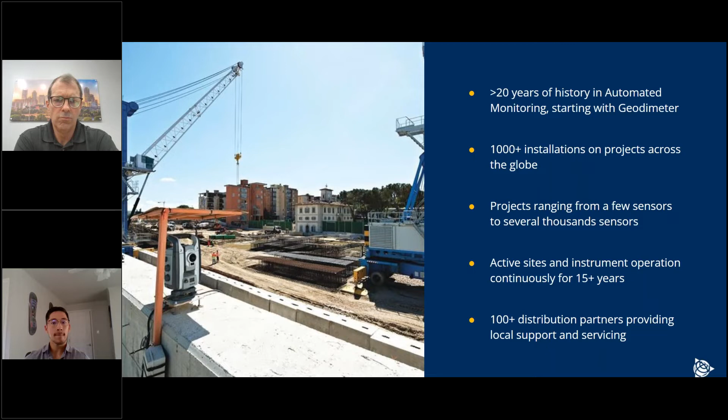We offer everything from that semi-automated to that fully automated system. As we like to say, from the tripod to the pillar installation. So the semi-automated being focused on that traditional manual workflow, but really just automating those workflows. So if somebody's going to site with a total station or a GNSS rover or geotech equipment, and they're taking those measurements manually, we're really working to make it easier to do that so it frees somebody up on site to go do other things.

So with the total station and data collector, it's got a module on there that will run the rounds for you. So you can set your total station up, connect your data collector, run rounds all day long, and then tear your stuff down and go home, come back two weeks later, set it up and do the same thing.

And then we also have that fully automated setup. So when you set your total station up in the field permanently to run 24/7, either because you have a higher risk structure that needs higher frequency data on it, or if you're operating for a long time, it just makes more sense to set it up permanently so you don't have to keep going back to the field. We really have a solution dedicated to each of those workflows.

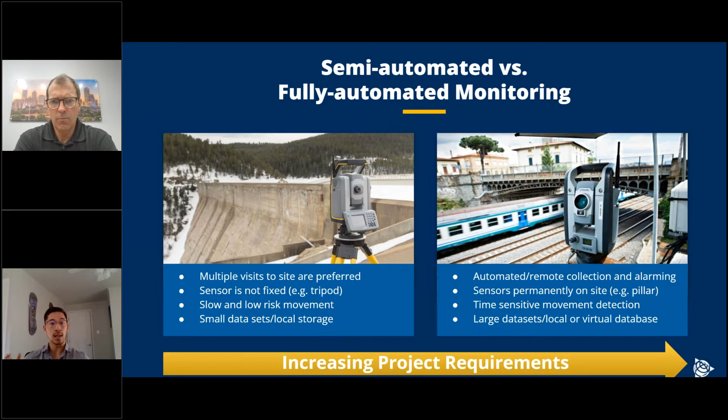Today we're focused most on automated monitoring, so we'll do that highlight for the portfolio. There are really three main components to an automated system. One, obviously, is your sensors in the field. And with the automated system, there's a lot more flexibility with the actual sensors that you're using. So you can use anything from the standard total station and prisms, GNSS systems, and adding geotech and weather stations to that mix, combining all sorts of different data types.

Everything in the field is going to need power and communications. Anybody who set up a system knows that that's a key component.

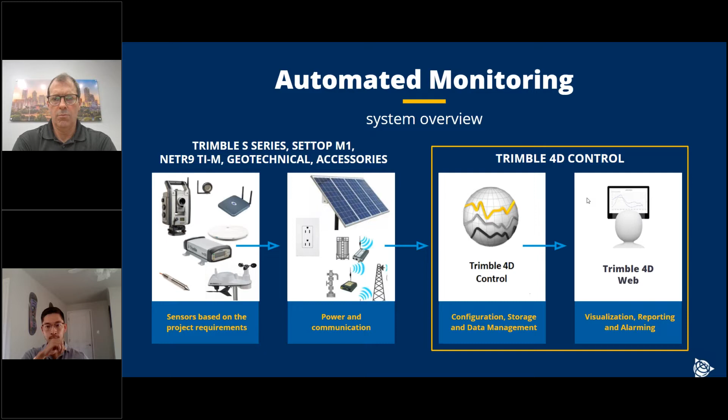And then along with that, we have the software package called Trimble 4D Control, or T4D. That's split into two sections. There's T4D Control Server, which runs as the backend that does all the data collection and data processing. And then the front end, which is called T4D Web or Trimble 4D Web. That's really what users and customers are going to interact with. It's the tool we have for visualization and reporting and alarming. Really anything that's going to be that data visualization.

For sensors, I'm going to go through that quickly. We use the Trimble S Series for the total station. The S Series comes in all sorts of different flavors. The workhorse is the S7. That's going to be kind of the all-inclusive total station. It's going to be available in robotic and auto-lock flavors. So if you're going to do some robotic surveying, you can use it and deploy it in multiple places. It's really good for general surveying. It's also really good for monitoring. It's just kind of the standard deployment for total station.

We also have available the S9, which is specable with a lot more options. So it's really similar to the S7, but you can get it in higher accuracy EDM and higher accuracy angular specs. And you can also get it with long range fine lock. So if you have some more specialty applications that require higher accuracy or longer range, you're going to want to go with something like the S9.

And then we also have the S5 Ti-M, which is the scaled back version that's totally dedicated to monitoring. We don't deploy these as often, but it is available. So if you need it, you can get something dedicated to monitoring. You're going to set up maybe in a rough environment that's going to run for a bunch of years and you're not planning to deploy it anywhere else. The S5 is a good option for that.

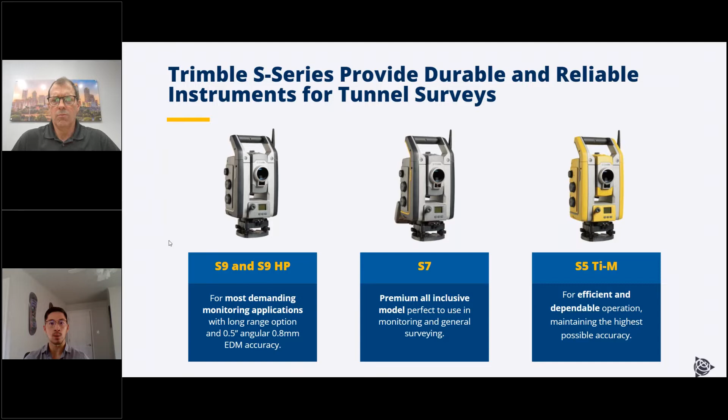The total stations are extremely reliable and durable. They are IP65 rated and use a frictionless magnetic drive system, so they're super impervious to things like moisture and dust. This lets you set it up in the field knowing it's going to keep running, totally designed to be out there 24/7. You don't have to worry about it raining and needing a new total station. It's really designed to give you the confidence you need to install it and run it all the time.

They're also super interchangeable. So if your total station needs to be calibrated because it's been out there for a bunch of years, you're free to take it off the tribrach and put a different total station back on, doing a hot swap and keep running. Get the other instrument repaired or calibrated, and then put it back out in the field.

The S Series is also a standard survey total station, so it's really easy to deploy. If you're a surveyor and you have a few at your hands, you can take one out of your fleet, put it in the field and have it run for a bunch of years, and then take it off and put it back in your fleet for surveying applications.

Most total stations are also specable with Trimble Vision, so you can have a camera in your total station that makes it a lot easier to manage your site. You can add targets remotely or just check the status of the site without having to go there. Monitoring sites can a lot of times be a few hours away from your office or where you live, so if you're doing something simple like adding targets, it can save you a whole day's travel. You just open the instrument, add the targets, it takes 10 minutes, and close it and go about your day. Instead of driving 3 hours to the site and 3 hours back, you can just do it during your lunch break.

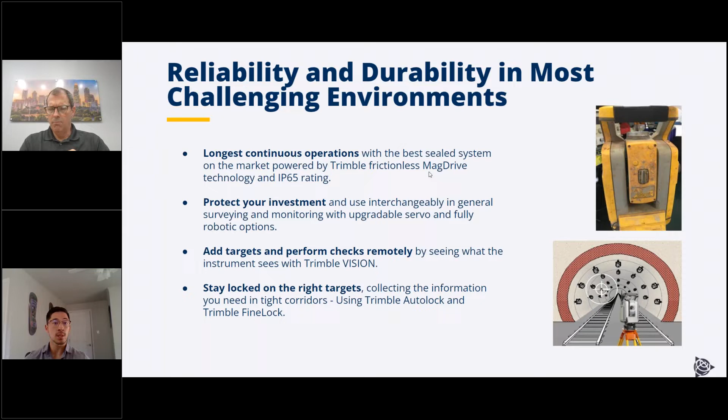We also have GNSS offerings. As you guys know, Trimble makes a lot of GNSS. We have everything from survey rovers to base stations and everything in between.

GNSS monitoring is great for high interval monitoring, where you need to take data at 20 hertz instead of every few minutes, so collecting data from a GNSS receiver is a great way to do that. It's also good for widespread settlement and regional monitoring. A total station has a range of 1,000 or 2,000 meters, but a GNSS antenna can cover an area of a city, a state, a county, or something huge.

T4D is also really good at GNSS processing. Having that GNSS in there and doing a combination of real-time and post-processing to get those rapid alerts and high accuracy results, it's all super customizable and really easy to set up.

It's also super flexible, so you can use your base stations or monitoring stations as one or the other. If you have surveyors on site, they can connect with their rovers and do RTK or VRS corrections from the receivers directly, and then you have a multi-purpose receiver all of a sudden. It's not just dedicated to monitoring, and it's not just dedicated to being a site-based station, but you can use it for both applications.

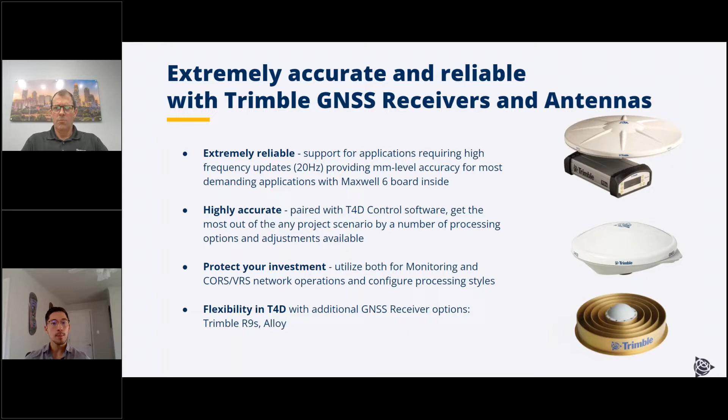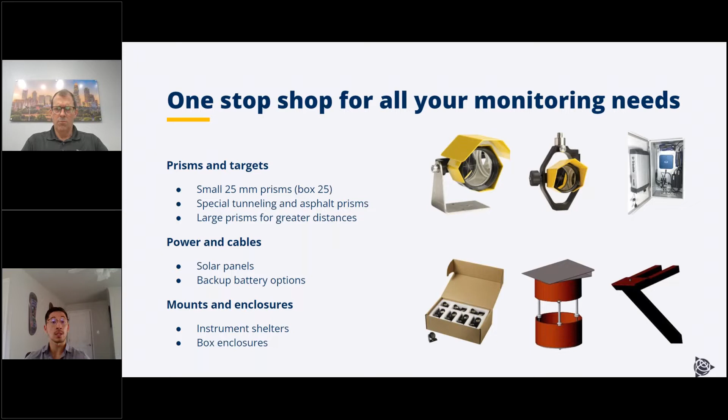We also have all the accessories you would need to turn your total station, GNSS, or geotech equipment into a fully automated system—things like prisms, houses, and mounts. We're really a one-stop shop for everything you need for monitoring.

We have all different flavors of prisms, depending on your needs. If you're doing a standard job where you just want to set up 50 prisms all in L brackets, we have those. Long-range prisms, integrated GNSS, and specialty prisms—pretty much everything is available.

The mounts and enclosures as well. We have high security or high protection options for your total station mounts. We can do wall mounts and pillar mounts, so any installation you have, we can work with it.

As well as cabinets, either for the M1, which is the field controller we use for total stations, or one large enough to house both the M1 and your GNSS installation. So if you have both on a site, you can put them in the same housing and simplify the power and housing solution.

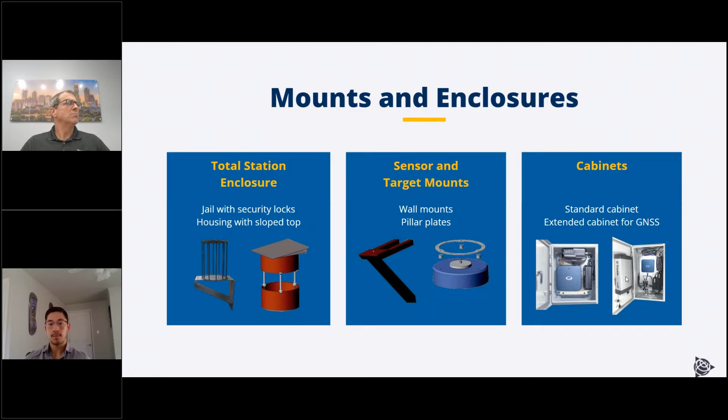In addition to that standard geospatial portfolio, we now have geotechnical sensors. I won't go into too much detail here, because the world of geotech is deep and we could spend hours on it alone. But basically, we have data loggers connected to things like a piezometer, vibrating wire sensor, extensometer, or crack meter, and they'll take data automatically from those sensors.

In addition, we have laser distance meters and tilt meters that can measure convergence and tilt on structures. All the sensors communicate with long-range radio back to the gateway, so deployment is extremely flexible—we can have your gateway up to 15 kilometers away from your sensors. You can have this at a site office or an office down the street from your actual construction or monitoring site, and everything communicates in no problem.

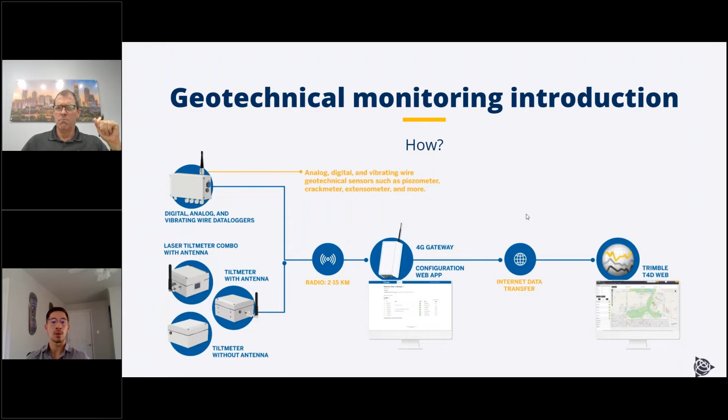It transfers the data via API into T4D Web, and you get all the standard features of T4D Web—data visualization, reporting, and alarming—with your geotech sensors, and if you're using it with all your sensors in one place, your total station, GNSS, and geotech.

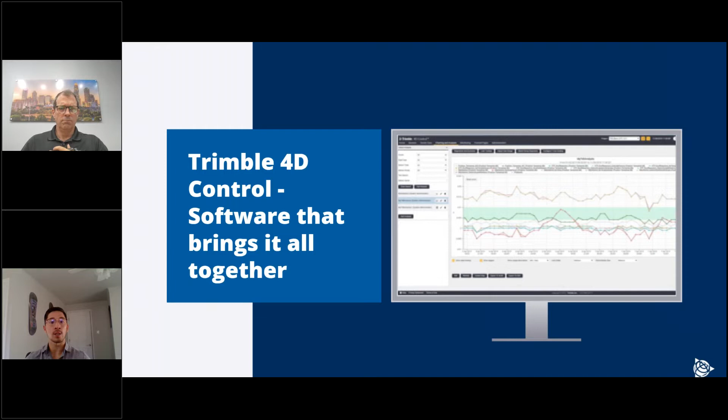T4D is the software that brings everything together. It's really meant to make managing the site that much easier. There are a lot of different visualization and reporting tools you can use—whether a simple chart, a heat map, or a scatter plot. It's made to give you the tools you need to show the health and status of your site, and it's a really easy-to-use sensor management and data integration portfolio.

There's a really powerful backend that does the geodetic processing and adjustments for your total station and GNSS, plus all the visualization and reporting tools. It makes it easy to see exactly where displacements are using the heat map. You can make charts and visualization tools combining multiple data sets—so if you have geotech or GNSS in combination with your total station, you can pull all that data together and show it as one coherent data set.

There's also conditional alarming and reporting, giving you a way to cross-validate data. For example, on a rail project with tilt meters on the ties and prisms on the rails, you can have charts, reports, and alarms showing that data in combination—a self-validating alarm that checks if the tilt has moved this much and the prism has moved this much. Then the alarm is real, and it triggers and alerts everybody on site.

So it's really designed to be as simple or as in-depth as you need it to be, depending on your project requirements.

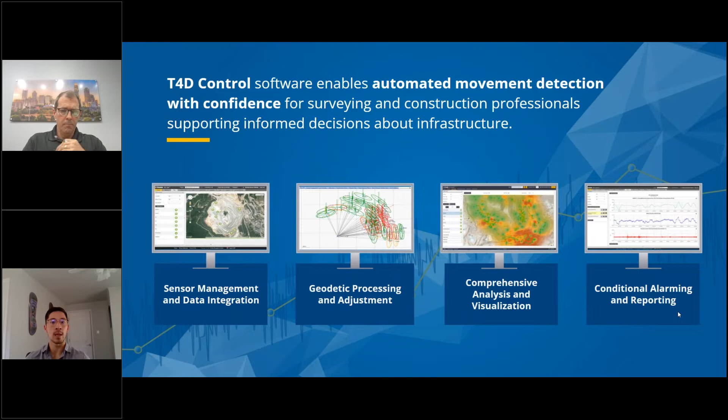One of the most powerful aspects of T4D now is that it can integrate all three data types. So whether you're doing a project with just total station, just geotech, or a combination of all three different data types, you can bring it all together and use them as needed.

Perfect, and that is my overview. Do we have any questions come in? Hopefully it's pretty straightforward.

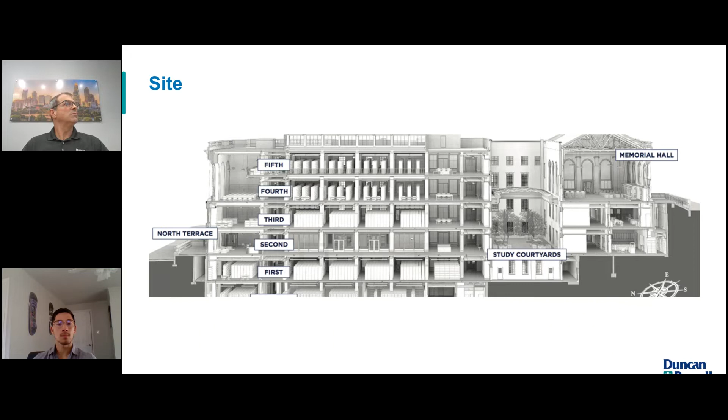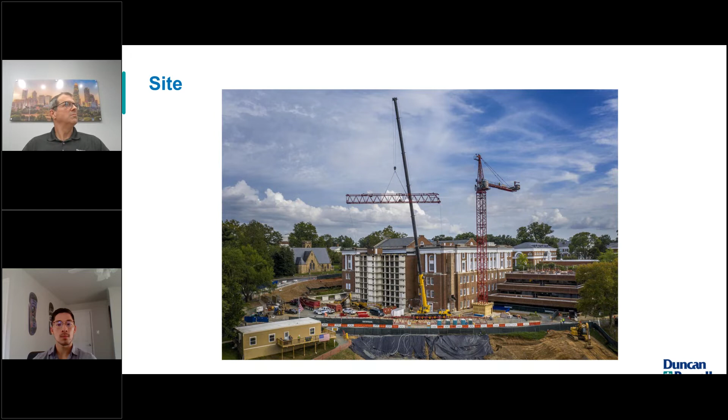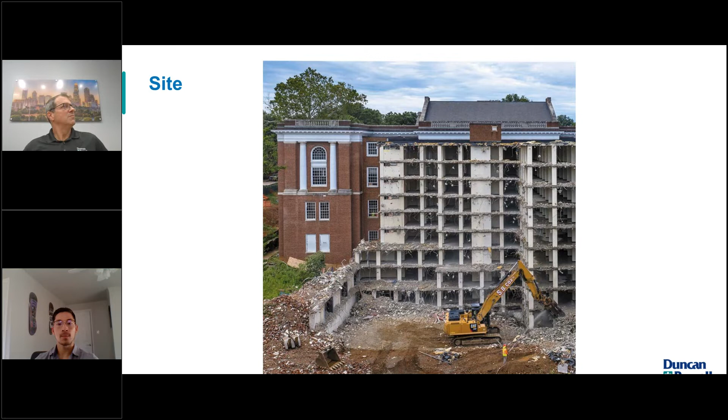So what the university wanted to do was make better use of that space, and now they're building a state-of-the-art library addition where the old stacks were. Part of the challenge is that we have to tie to the existing structure, and the courtyard is a very sensitive area of that structure, and the wings have total stations installed in all of them. What you're seeing here is the building partially demolished, with the wing over on one side. They've done demo and are also underpinning all the new foundations for the building. So the new structure is going where the old structure was, and also being expanded, making a larger footprint of the library.

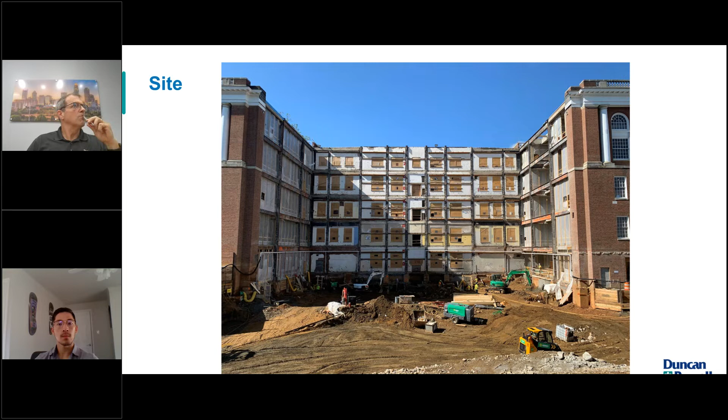This is what the mount looks like. We've got 2 instruments out there, one on this mount here, and one directly across from it. I think the decision to mount the instrument on the building was driven by all the points we had to see and trying to get sight lines to them while they were actually building the foundation of the new addition here.

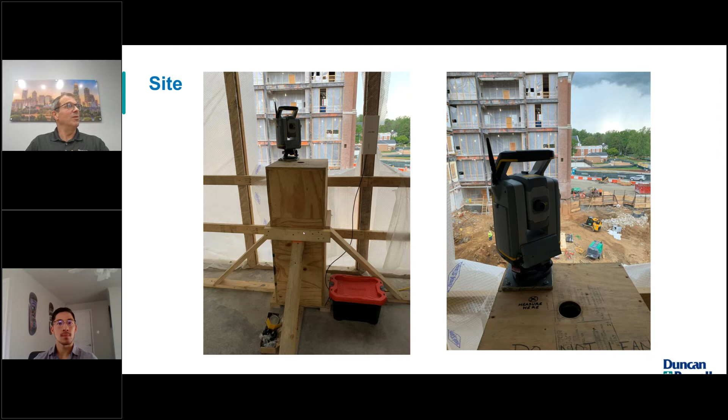I like how they wrote 'Do not lean' on this thing on the mount there. It's important, resting against it. But both of these are actually very stable. They worked out really well.

Was there any monitoring done during that demolition, since structures were in the way? There was not. The original plan was to have everything installed before there was any demo whatsoever, but that isn't how the project progressed. Like a lot of construction projects, it's a changing environment — you don't really know what's happening until it's there. So in some ways it wasn't ideal because we didn't have any baseline measurements going into this.

After the demo was done, that's when we started installation of these targets, and Skanska actually installed the majority of the sensors on site. That's right, so Skanska put most of the prisms up.

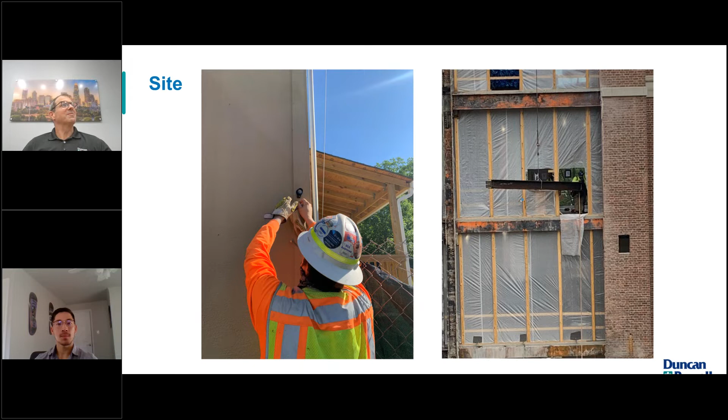I just put this image in here because it's a typical construction site — we're working on one instrument, and all of a sudden they cut this hole in the plastic and start flying steel in like 3 feet from other instruments. Just typical. So that's really the project and the images I had.

So that's all the images I had of the project just to show. I can stop sharing my screen if I could figure that out — that's the biggest, there we go. So the rest is really just to kind of interview and talk with Cheryl, discussing our combined experience.

Now, Cheryl, you said you were brought into this project because you guys were out there, you had a relationship with Skanska, you were already on site surveying, and then you brought in a partner to help with some of the other geotechnical type instruments, settlement and vibration, I think. Was there a monitoring plan given to you, describing where the instruments should go or the prisms should go, or did you guys have to develop that on the fly?

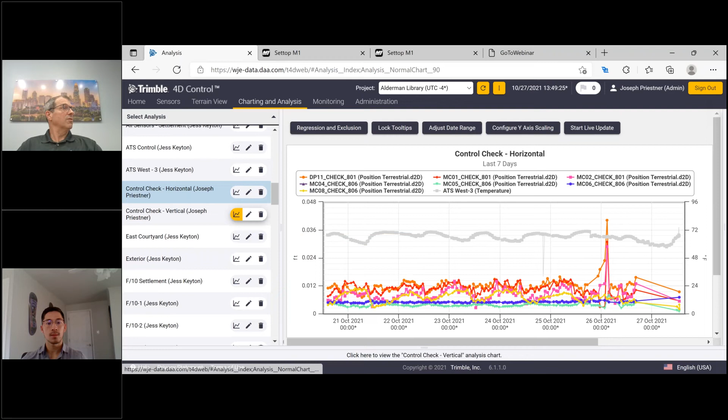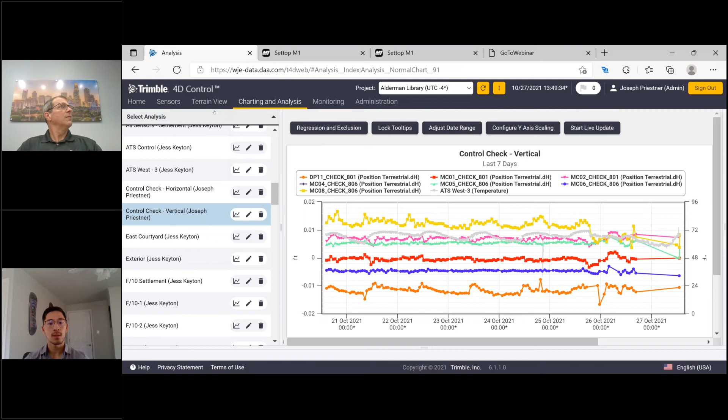Joe, would you mind showing that custom view one more time too? That view of the horseshoe with the targets there? Sure, I know there's a good anecdote about some of the displacements on there. Yeah, this one, actually I have to click on it. So this column right here was the problem child in the beginning.

They started working on this foundation, underpinning all this. So they're working on this foundation, and this column started to move. It was right in the very beginning of the project, and so everybody was questioning, is that really movement, blah blah blah. But we could show them that the other ones weren't moving, we got 2 thousandths here, all these other columns weren't moving. It was very early in the project, and you could see this graph, you could see the trend. The trend was evident, it was moving about half a hundredth a day.

And it was also with settlement as well, so it was not only kicking out into the excavation, but it was settling. So you could see what was happening, and they finally caught it, they finally stabilized it. But this was the one that was causing the consternation, over a 32nd of an inch, because it was a 32nd of an inch underneath the threshold to shut the job down, so bouncing back and forth.

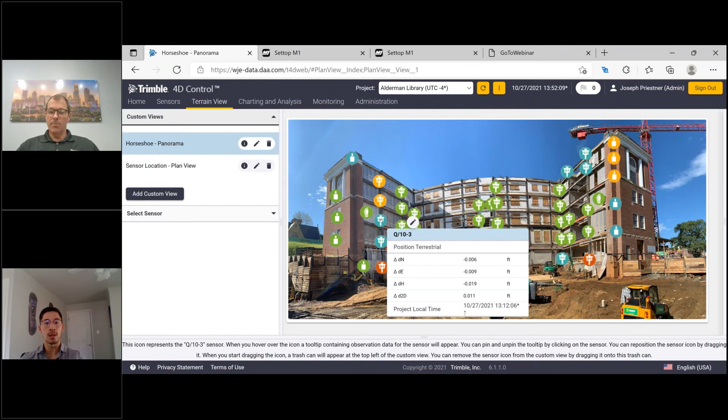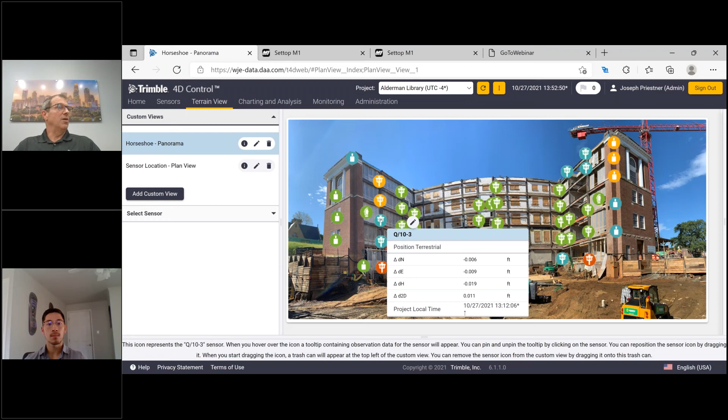Yeah, that's a question for Cheryl. I think she said once a week, right? It's actually supposed to be every 2 weeks. Had an issue with our data collector, so we're a little bit overdue, but we're out there monitoring right now, actually. So, but yeah, basically every 2 weeks. So they just take those coordinates, adjusted coordinates, then import them, make sure they have the right IDs, and then import them right here in the website. And it updates all the graphs. They can get all the same kind of graphs on these that they do on the automated points.

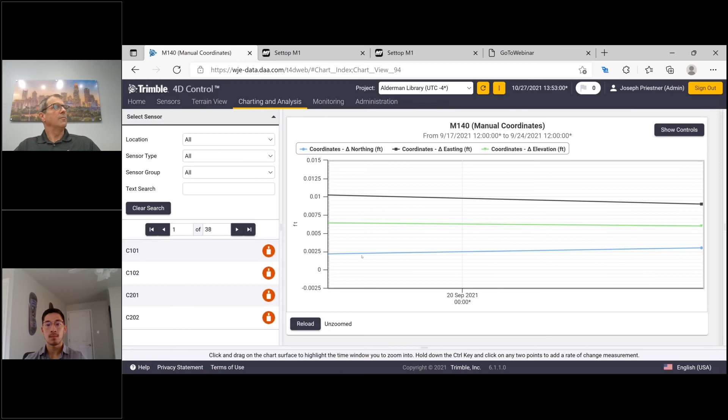Yeah. So same type of graphs. But you can see, these graphs are all editable. You can turn things on and off. The analyses are where you have regressions and things like that you can do to spot trends.

Okay, we're getting close on time. Let's see. Yeah, I think we just had one more question come in, which is kind of to do with the accounting and project management. And so this is a web page. You can publish it to a public URL. And because it's accessible via the internet, we want everything to be kind of locked behind some security.

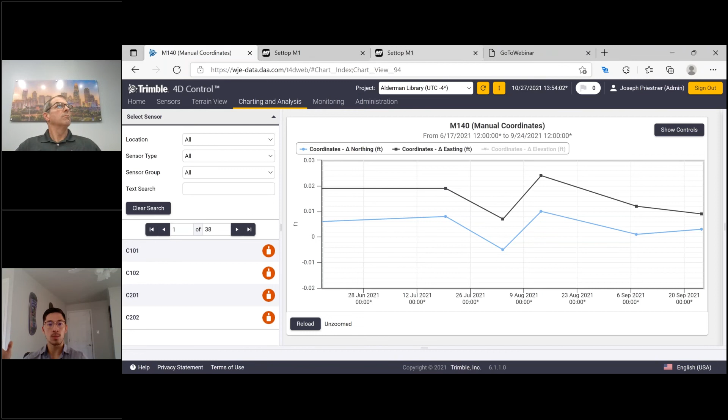So anybody that has access to the system gets set up with an account that is bespoke to them. It's their email address with a custom password. You can also set all sorts of different access levels there. And so a lot of people are just going to have kind of read-only access to this, where they just come in and see the charts and receive reports. And then you can have some key people be analysts or admins on the project.

And you can also have multiple project sites run through a single instance of T4D. So if Scansco is running this Alderman site and another site at UVA, you could split it into 2 places. And then just people working on one site or the other can receive reports and emails that are only relevant to them, so not seeing multiple data sets they don't care about. So things can be very customizable that way.

Yeah. And there is an IT component to this. So if you're going to tackle an automated monitoring project, you're going to be installing - you probably want to dedicate a server to it. You're going to be running Microsoft SQL Server.

For a good reason. And so all I do is I send them a GoToAssist link, and I haven't waited more than 5 minutes to get into their server to troubleshoot something. So their IT department is great, but you may have to involve, if you have an IT department, involve them.